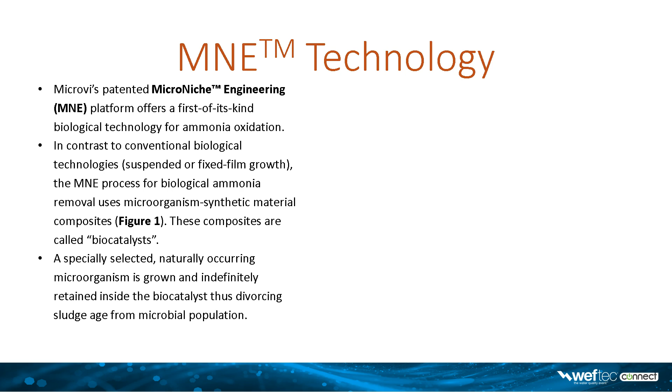In that way, we're able to divorce sludge age from microbial population, allowing us to maintain a particular population of organisms that are relevant for the particular applications. These applications can cover everything from ammonia through to BOD to phosphorus to numerous different applications.

Effectively, in traditional treatment, these organisms are present. However, they may not be there in sufficient numbers because they're outcompeted by the fastest growing ones. They may be more efficient than those that are the fastest growing ones. However, because they're outcompeted, they're not there in significant numbers. The Microvi technology takes those particular organisms, intensifies them, and places them inside this perfect environment, which allows them to be successful in the application that they undertake.

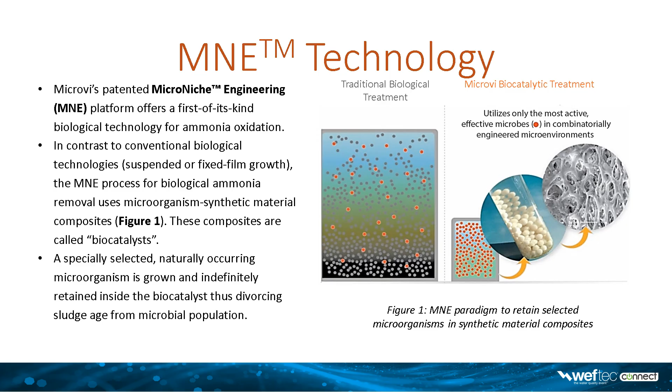Thames Water, who are the largest UK water utility and approximately the fourth largest in the world, have a number of tertiary ammonia removal processes in their asset base, installed typically 10 to 15 years ago. They have consents ranging from 1 milligram per litre up to 3 milligrams per litre, which these nitrifying systems have to achieve. During the course of the operation of these systems, Thames Water have established a number of operational issues that they've had to overcome and are therefore looking for alternative treatment processes that overcome these issues inherently.

So Thames Water worked with Microvi to establish a pilot program in order to assess the MNE technology and start to look at things such as process responsiveness, operability in terms of simplicity, its load response, and in particular its temperature response, where they'd seen a number of treatment assets struggling during low temperature operations that are experienced periodically during the winter time in the UK. They also wanted to establish the design limitations in order to allow full-scale comparisons and also to undertake dissolved oxygen response testing in order to establish the energy impacts.

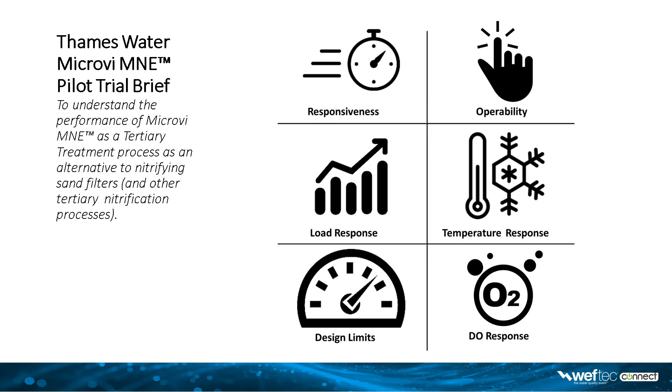It's fair to say that a lot of tertiary ammonia systems on the market today either have to operate at very, very high dissolved oxygen levels to achieve performance, or themselves do not control dissolved oxygen effectively. So these were part of the studies that were to be undertaken during the trial from July 2018 through to May 2019.

A representative Thames Water site was selected for conducting the pilot study. The site itself was an existing trickling filter plant of around about 5,000 population equivalent. The site was fitted with nitrifying sand filters as a tertiary process, thus allowing the Microvi process to be compared directly with an existing operational system. The process on site consisted of headworks, primary tanks, rock media trickling filters, humus tanks, and then the nitrifying sand filters.

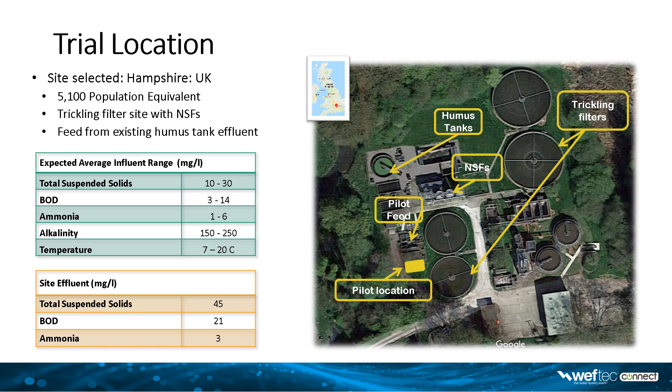The feed for the Microvi system was the feed for the nitrifying sand filters and would be typically 10 to 30 milligrams of suspended solids and between 1 and 6 milligrams of ammonia. The expected temperature range was between 7 and 20 degrees C. This typical asset represents the asset base across Thames Water where this technology is typically provided, and therefore would give Thames Water a direct look of how it would look and feel if the Microvi process was successful and how it could be applied across its wider asset base.

A brand new pilot plant was constructed for this particular study. The pilot plant consisted of 2 reactors, each of 2 cubic meters in volume. The reactors could be operated either in series or in parallel. For the majority of this study, they were actually operated as 2 separate parallel reactors, allowing testing of different dissolved oxygen concentrations, for example. The reactors themselves are relatively straightforward. They're a single pass system, influent coming in at one end, effluent leaving at the other end.

The reactors themselves are of a sufficient height to allow good oxygen transfer and not be compromised by any scale-up issues that are sometimes associated with reactor height. The reactor itself was fully instrumented with instrumentation on the inlet for ammonia and turbidity, as well as nitrate and nitrite. Each reactor was fitted with ammonia, dissolved oxygen, and pH, and the effluent was fitted with turbidity.

The design flow was between 2 and 12 cubic meters per hour, giving hydraulic retention times of between 0.2 and 2 hours. The aeration system was fine bubble diffused aeration and can be controlled using conventional dissolved oxygen set point control. Mechanical mixers were fitted that could be operated independently of the aeration system, allowing you to turn down the airflow to the reactors and not compromise the mixing of the system. The entire system was fully automated and could also be remotely accessed and operated, thus allowing full flexibility in terms of control and undertaking different operational cycles.

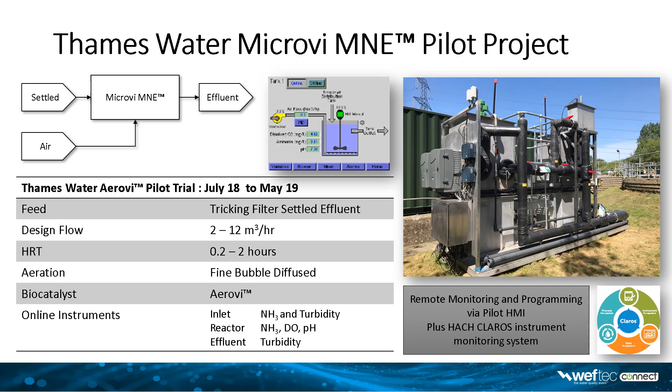The biocatalyst utilised in this particular project was the Aerovi biocatalyst, an organism that has been selected for its efficient removal of ammonia, but also BOD, either simultaneously or independently. Typically, the biocatalyst has a nominal diameter of 5 millimeters. 587 kilograms or 1,250 pounds of biocatalyst was added to each reactor, giving a packing density of approximately 27% by

volume. This biocatalyst was actually manufactured in 2015 and held in storage before being transported to the UK and utilised in this particular project. That's one unique factor of the biocatalyst and the Microvi technology, its ability to manufacture and store for considerable periods of time before being utilised in its application.

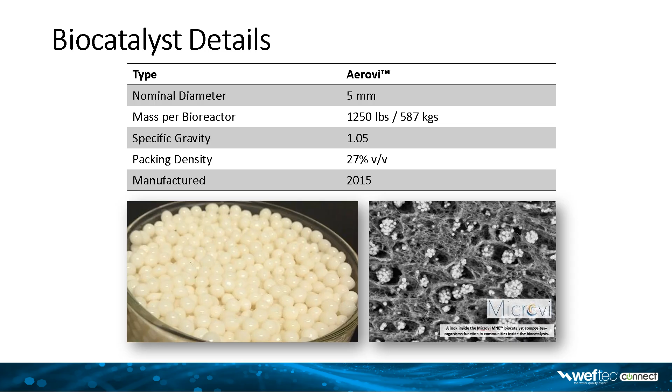The pilot plant was commissioned on the 21st of May before operation began in the first operating mode on the 4th of July. We ran a number of different operating modes. The first one was declining flow, although that was related to the fact that the influent pump would clog periodically, resulting in the flow slowly dropping over the course of a 1-week period. That was cured with the installation of a variable speed pump on the 4th of December, which allowed us to run at continuous fixed flow for an extended period.

28th of February represented a period where we moved to much higher flows to test the hydraulic retention time capabilities of the system before moving to a diurnal flow pattern, a flow pattern that matched the existing works influent, before moving to the high diurnal flow testing on the 28th of May 2019. Interspersed in these operational modes were periods of shutdowns and startups, as well as different levels of dissolved oxygen testing in order to understand how responsive the system was to these different applications or aspects of operation.

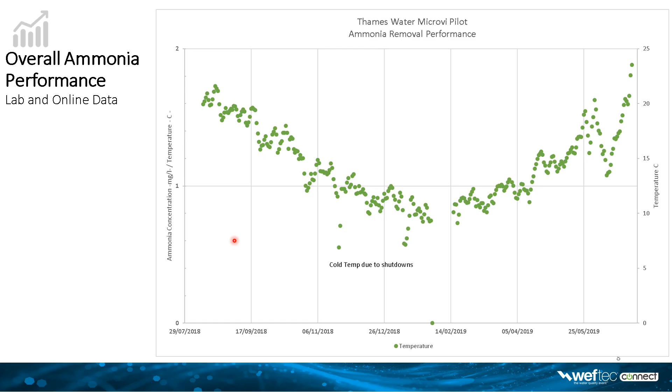When we look at the actual influent and effluent ammonia, this is the readings from the lab data that was taken by Thames Water using composite samplers. The blue dots here represent the influent ammonia, and you can see it ranges from relatively low, just above 1 milligram per litre, cropping up to around about 4.5 milligrams per litre. When we look at the final effluent or the effluent from the pilot plant, we here have the red dot, which is the effluent from reactor number 1 only.

When we look at the little grey dots here, that's from the lab data for the combined effluent from reactor 1 and reactor 2. The majority of time the reactors were run in parallel operation. And then there are a few samples for reactor number 2 showing again very good performance. As you can see, most of the performance is below 1 milligram per litre. In fact, most of the time the effluent sample is coming back from the laboratory at the limit of detection, which is 0.05 milligrams per litre.

Now, as I mentioned, the pilot plant had a number of online instrumentation. When I overlay the online ammonia monitors onto the system, you can see the performance in a little bit more detail. Here in the purple dots, we actually have some influent online ammonia. Previous to this point in here, we were utilizing an ion selective electrode for the influent ammonia. Given the very low levels of concentration in the influent, it was proven to be unreliable.

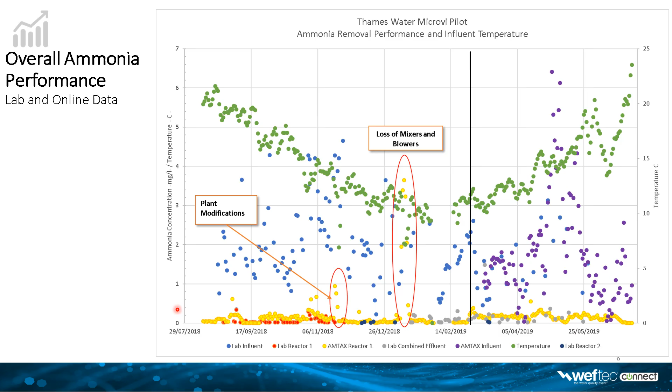Again, when we look at the results coming through across the entire period, you can see the effluent performance under normal operation to be less than 1 milligram per litre, and in most cases less than 0.5 milligrams per litre, indicating very good performance across the entire range of temperatures that were experienced during the course of the pilot study. Breaking these results down a little bit further and then comparing the performance of the Microvi pilot against the existing nitrifying sand filters.

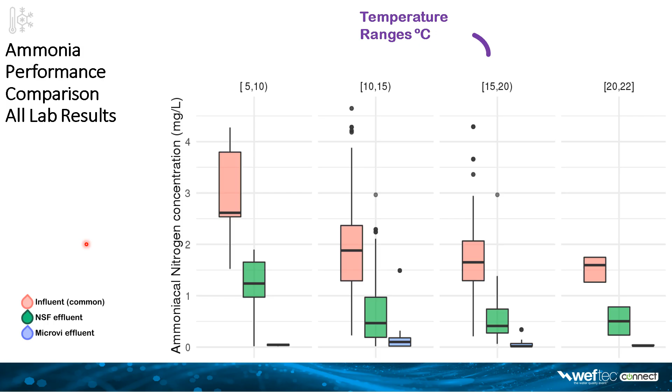That's not necessarily true of the nitrifying sand filters, which is one of the reasons why the study was undertaken in the first instance. And you can see there is a deterioration in performance in the nitrifying sand filter effluent during the colder temperatures. Again, this demonstrated that Microvi itself was able to manage performance across the temperature ranges, which is exactly what Thames Water were looking to try and understand across that particular study.

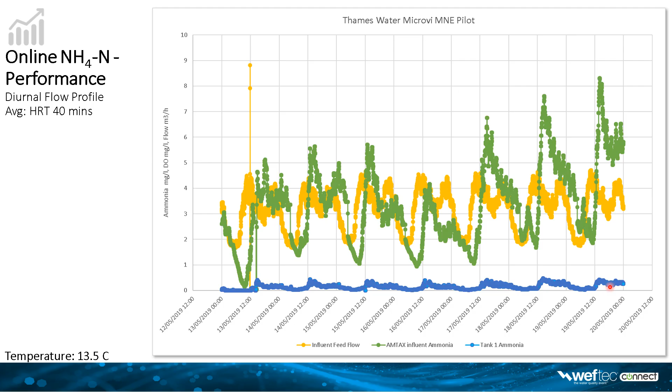This was done at an average hydraulic retention time of 40 minutes, although during the diurnal flow spikes, that would drop down to less than 20 minutes in terms of the hydraulic retention time. Performance again demonstrated very well. Here you can see there is a period where ammonia in the influent does increase up to around about 8 milligrams per litre, with performance still being maintained below the 1 milligram per litre throughout that entire period.

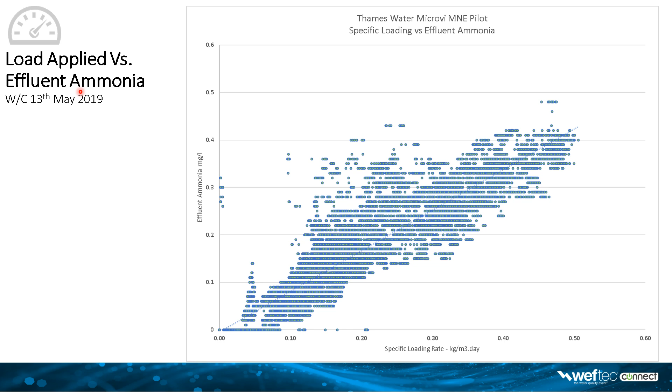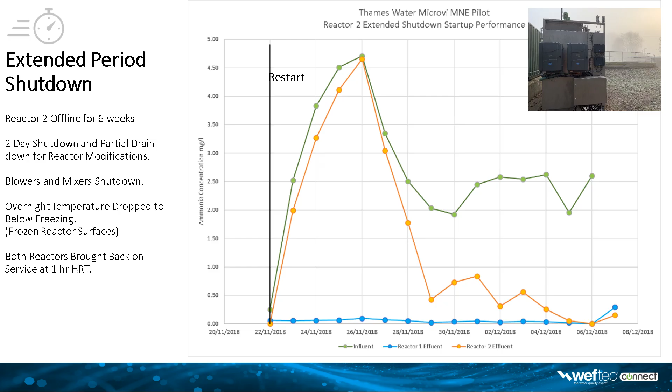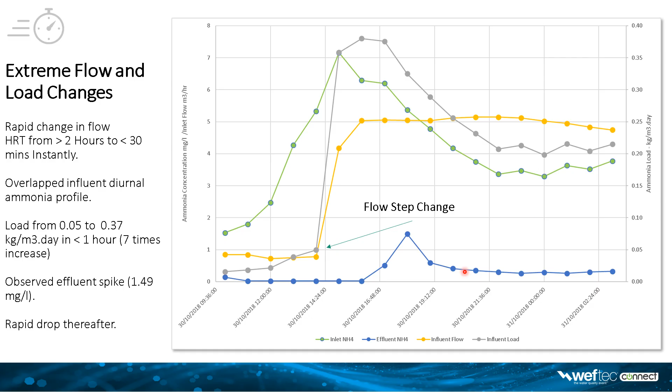Just to summarize the overall performance comparison between Microvi and the existing nitrifying sand filters. Here we're presenting the influent and effluent data from both the systems. One thing to note is the differences in BOD and suspended solids removal. We didn't expect the Microvi process to remove any solids, unlike the nitrifying sand filters, which it did do. And that was represented during the trial, where you can see that we achieved pretty much zero removal of suspended solids. A small amount of BOD removal that's associated with any residual soluble BOD was achieved, but not to the same extent as you would achieve in a solids removal process, such as the nitrifying sand filters.

The biggest difference here obviously was the performance in ammonia, where Microvi achieved over 95% removal, whereas the nitrifying sand filters struggled to achieve 70% removal. And this is against a backdrop when you look at the specific loading applied over the entire period. The Microvi system was loaded at almost twice that of the nitrifying sand filters, yet seemed to achieve a significant performance improvement against the system. So that demonstrated that in a like-for-like comparison, the Microvi process outperformed the nitrifying sand filters, both in terms of long-term performance, but also in some of the responsive curves that we saw.

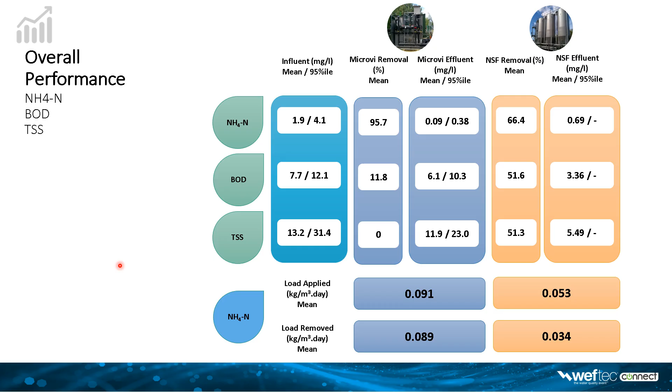So, drawing some conclusions from the results of the study, it was demonstrated that the Microvi process could outperform the existing nitrifying sand filters for ammonia removal, even at higher specific loading rates. And the whole process demonstrated 0.4 kilogram per meter cubed could achieve an ammonia concentration of less than 0.5 milligrams per liter at the 95th percentile. The process also demonstrated that it was robust under performance shutdowns and startup conditions, giving it some great potential as potential storm treatment. The process also is relatively simple, single pass with no backwash or generation of solids during the course of the study,

although it was not expected to see a huge amount of solids being generated for these levels of ammonia concentrations. In previous studies, the Microvi biocatalysts demonstrated a very, very low level of biosolids production during the conversion of either BOD, COD, or ammonia. But as expected, there was no solids capture from the process. So if there is a tightening of suspended solids consent, it may be necessary to couple the Microvi process with a downstream solids removal system.

The whole system could generate very, very low levels of ammonia at cold temperatures and at very short retention times, typically less than 20 minutes. And as a result, the Microvi technology can be considered to be viable for achieving low levels of ammonia, especially in the conditions of variable flows and loads and low temperatures.